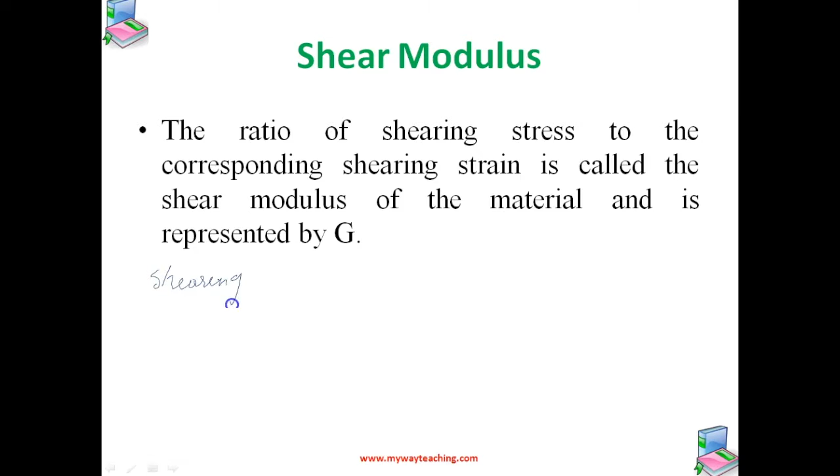So we know theta is equal to, what is theta? Yes, we can replace this by theta. The shearing strain we can represent by theta. So G is given by F by A by theta, another way of representing it. So the shearing stress, represented by sigma s, is equal to the shear modulus multiplied with theta.

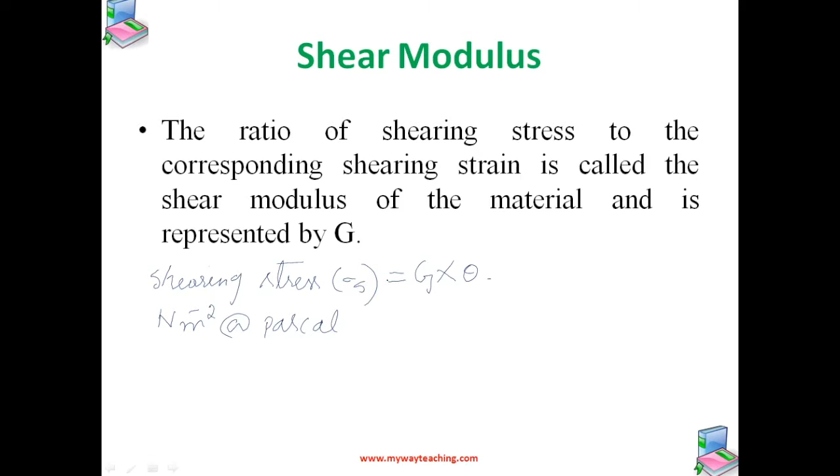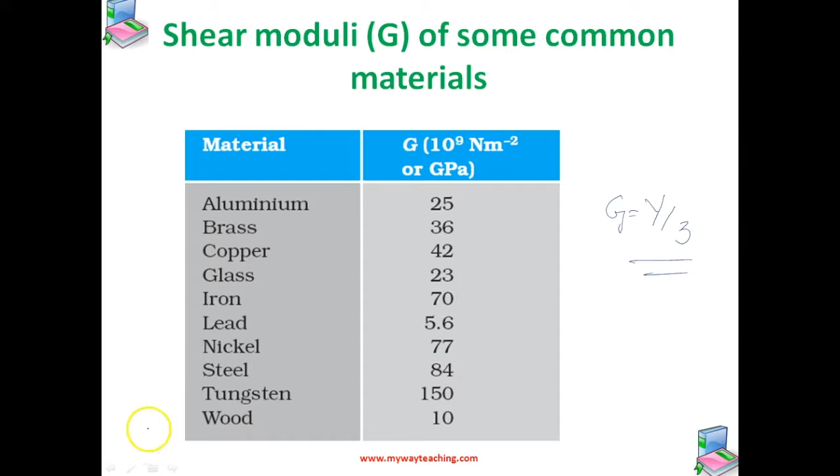So now let us consider a simple problem. A square lead slab of side 50 centimeter and thickness 10 centimeter is subject to a shearing force on its narrow face of 9 into 10 raised to 4 Newton. The lower edge is riveted to the floor. How much will the upper edge be displaced? So from the question itself, we came to know that they're asking us to find the value of delta x, that is the displacement.

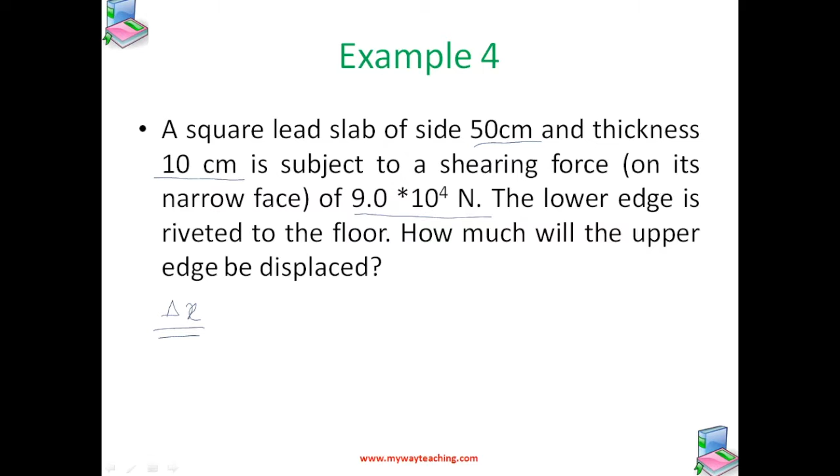So you can see this figure before proceeding with the solution. The lower edge is riveted to the floor, you can see here, and the upper edge will move slightly; it will cause a displacement of delta x, and this is theta. So the lead slab is fixed and the force is applied to the narrow face, the area of the face parallel to which this force is applied.

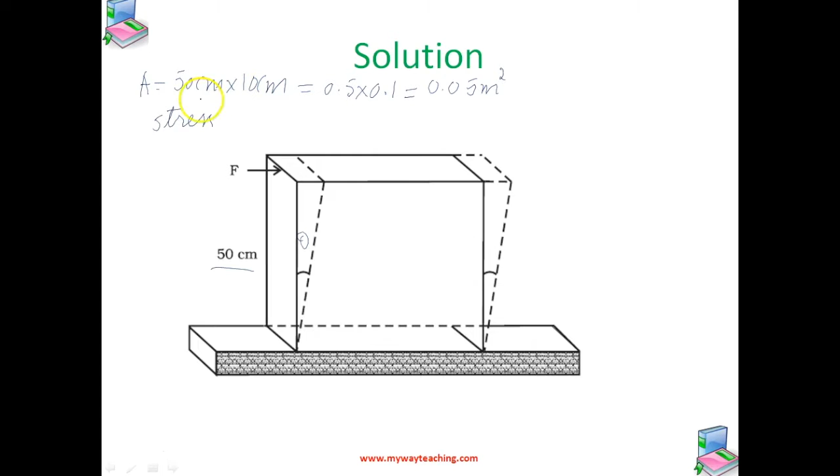So the area is given by, since both length as well as width are given, 50 cross 10, that is 0.5 meter and 0.1 meter, which is given by 0.05 meter square. So stress applied: here they have given the shearing force, 9 into 10 raised to 4 Newton, divided by 0.05 meter square, which is given by 1.8 into 10 raised to 6 Newton per meter square.

So we know that the shearing strain is given by delta x by L, isn't it? So here that is equal to stress by G from the formula. Here we want only the displacement delta x, so we can write it as stress multiplied with L by G. So we know the value of stress, L and G, so we can calculate delta x.

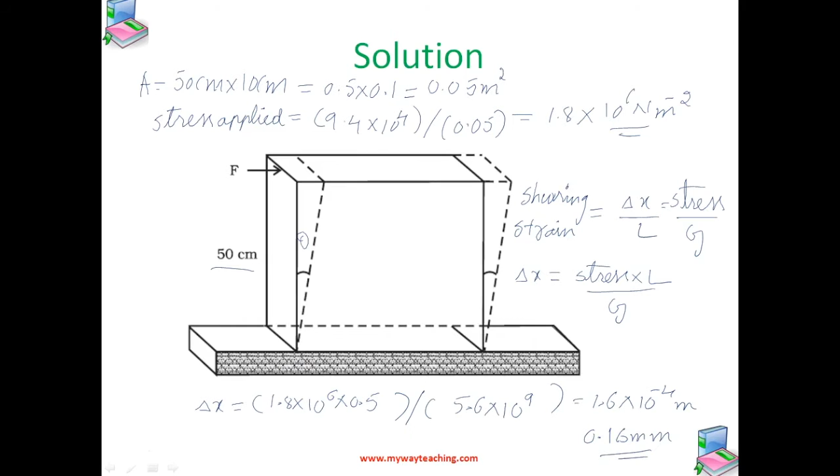So now let us study what is bulk modulus. We have already seen that when we submerge a body in a fluid, that body is subjected to a hydraulic stress, which is equal in magnitude to the hydraulic pressure. This leads to a decrease in volume of the body, thus producing a strain which is called volume strain. Since an equal pressure is applied from all sides, the volume of the body is reduced, resulting in volume strain, which is change in volume to the original volume.

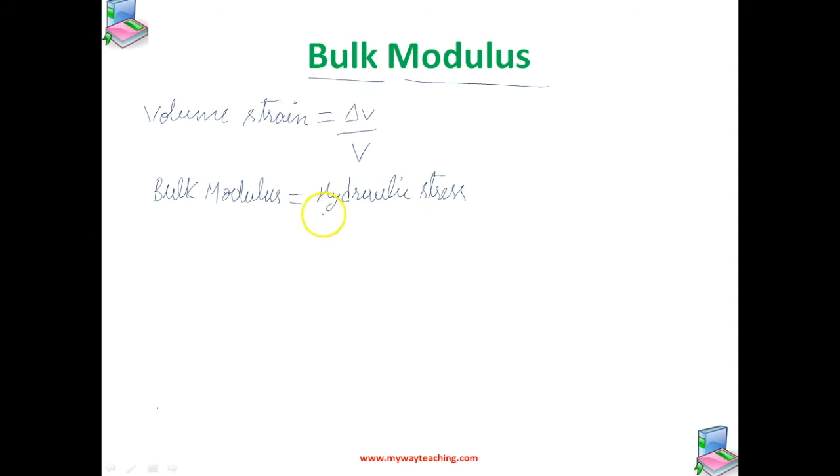So the ratio of hydraulic stress to the corresponding hydraulic strain is called bulk modulus. This bulk modulus is nothing but the ratio of hydraulic stress to the hydraulic strain.

So we call this ratio as bulk modulus. This bulk modulus is denoted with the symbol B, which is equal to the hydraulic stress by hydraulic strain, and hydraulic strain we already know is delta V by V, isn't it? The negative sign indicates the fact that with an increase in pressure, a decrease in volume occurs. So if P is positive, then delta V is negative.

Thus, for a system in equilibrium, the value of bulk modulus is always positive. So if P is positive, delta V will be negative, so it results in the positive value of bulk modulus. And the SI unit of this bulk modulus is same as that of pressure, which is nothing but Newton per meter square or Pascal.

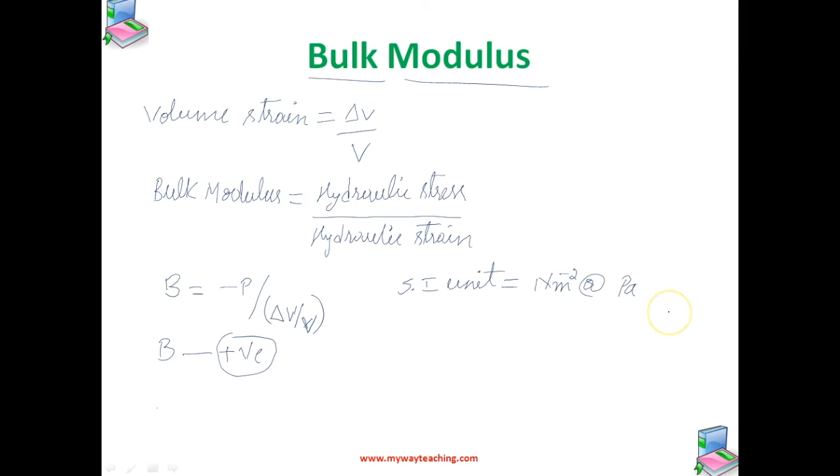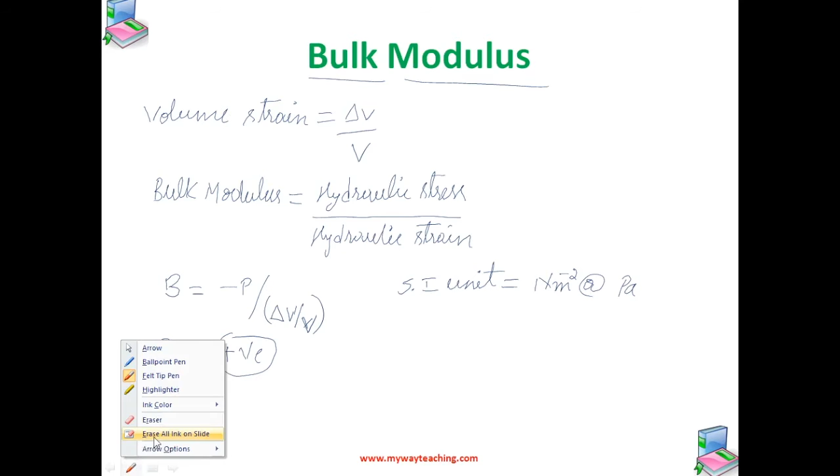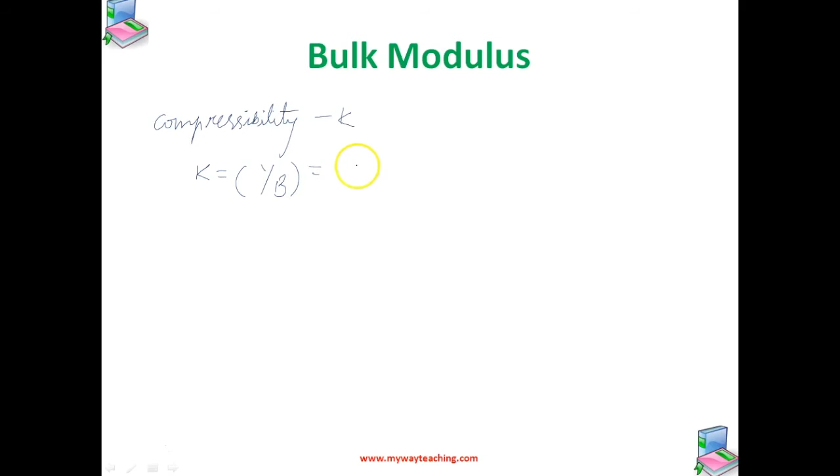See, the reciprocal of this bulk modulus is nothing but compressibility. We call it compressibility. It is denoted with the symbol K. That is given by 1 by B, the reciprocal of bulk modulus. We already know the equation for bulk modulus, so it can be represented like this: minus 1 by delta P into delta V by V, isn't it?

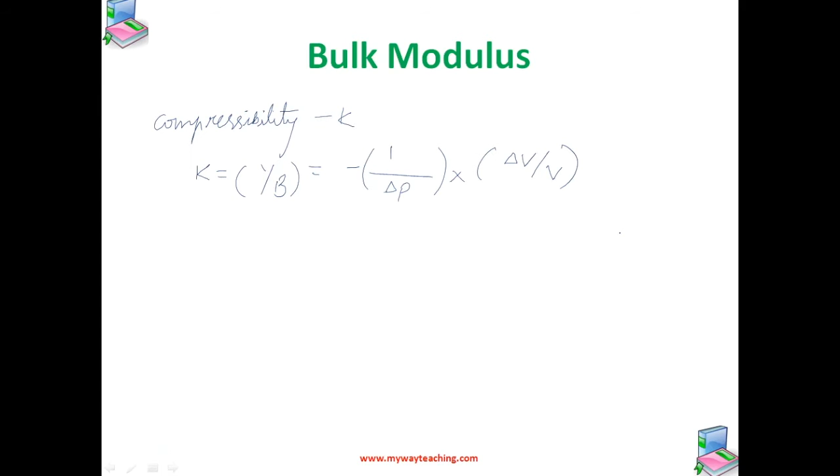So if you calculate the compressibility, since it is the reciprocal of bulk modulus, for gases the compressibility will be higher compared to liquids and solids. So gases are about 1,000,000 times more compressible than solids. So gases have large compressibilities which vary with pressure and temperature, isn't it?

Yes, and the incompressibility of solids is primarily due to the tight coupling between the neighboring atoms. The molecules in liquids are also bound with their neighbors, but not as strongly as in solids. And molecules in gases are very poorly coupled to their neighbors.